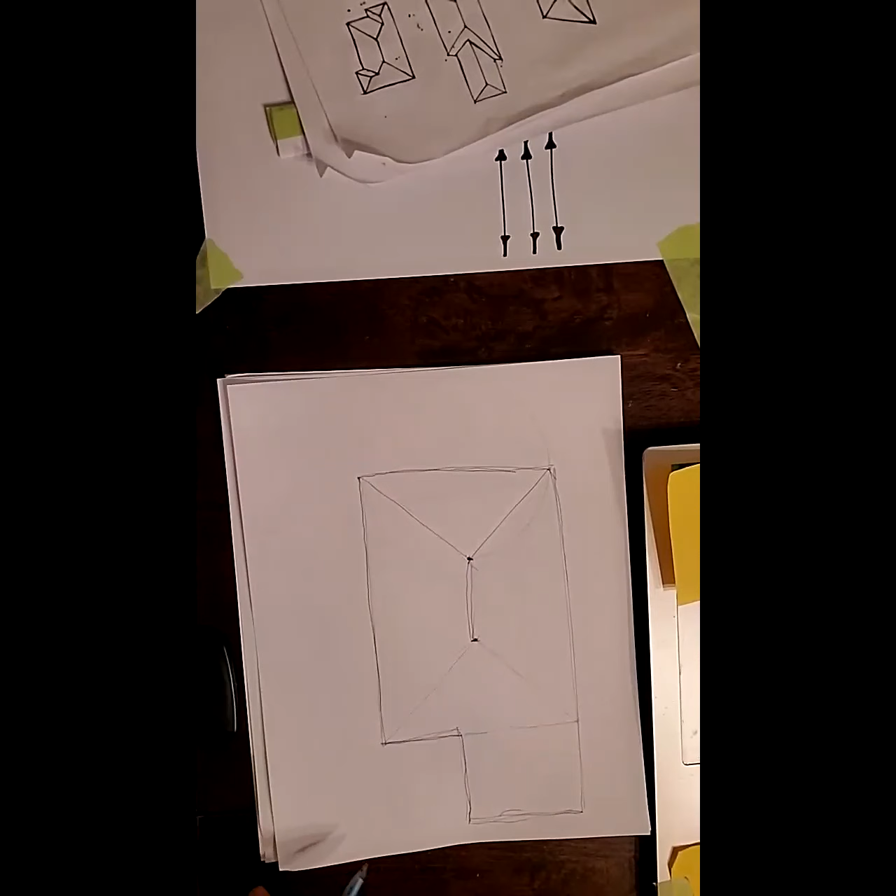Then you draw a line from here to here to complete the roof framework, the hip roof, to complete that first thing. We know that this one here will cut off at some point in time. Why? Because this end is not generated from a corner. So we know at some place on this line it will merge with another roof line, which will cut off at a point. Yeah? You have this so far?

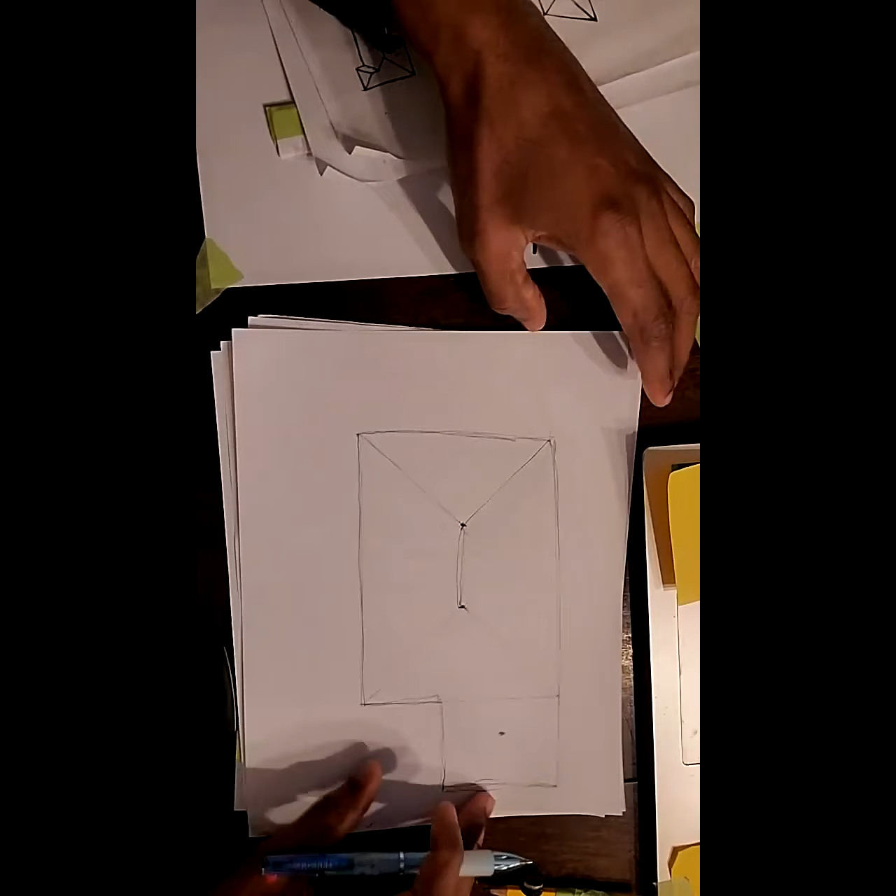Yes, sir. Okay, so our next step now is to go back to this here. And we know that this ridge is gonna run into this. So we're gonna find the pitch for this roof. Again, we use half the distance of this side, half that distance. And we mark that point right here. So we use this to get that distance. We get that point right there. Yeah. Then we draw our first construction line right here. First line right there.

And of course, we remember that the ridge must always be parallel to the longer side. Yeah. The ridge must always be parallel to the longer side. Very important. So we draw this line here until it cuts here. Yeah. Now at the point where this line meets that line is where this hip rafter stops, right here. So this hip rafter stops right here.

Yeah. And in like manner, this corner right here automatically joins at this point right here. Or it is at the same angle like this. So in AutoCAD, you could even copy this from here to here. And again, it is important to note that this line basically bisects this angle as well, either this way or that way. So remember the hip rafters always bisect the angle, right? So that goes up to that. Are you following? Yes, sir.

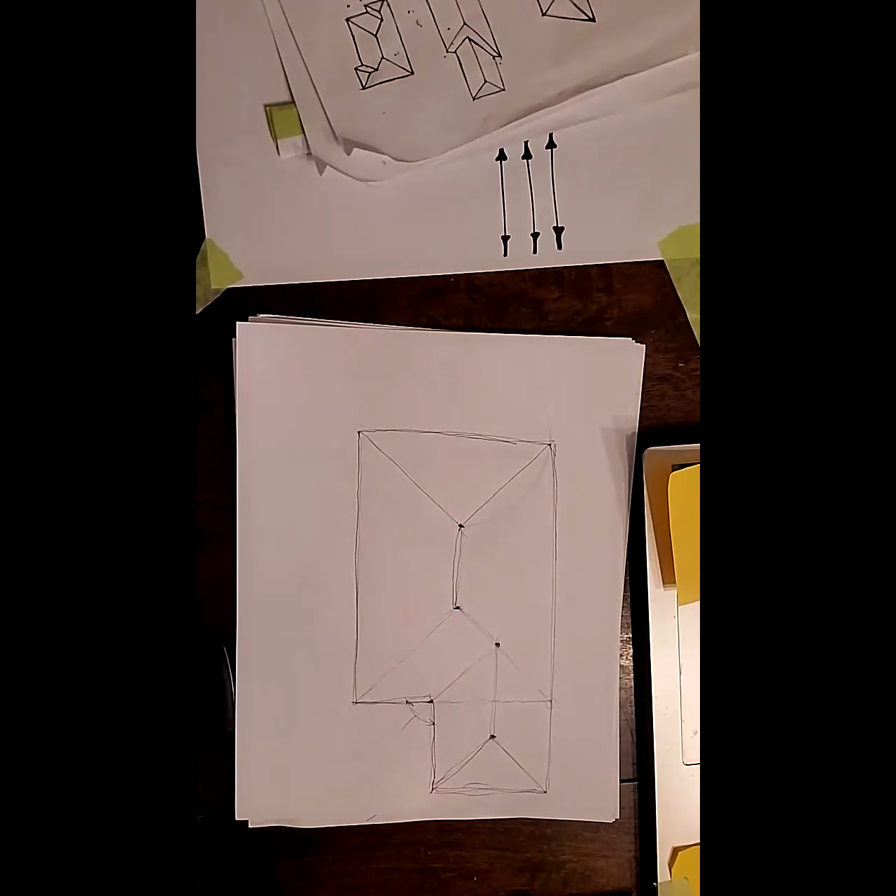Really, really curious. Now the next step would be to start to brighten up. So I want to start to brighten up from here, from here to here, from here to here. This point to that point, here to there. So this ridge meets that ridge right there. Then from here to there. Then from here to there.

And we could then go ahead and brighten up even from here to there. Brighten up this. Brighten up that with our outline. Brighten up this as well. Brighten up that as well. And go on to brighten up this part. Then we go from here, that point, there, here. We then brighten up this part as well. From here, we brighten that part.

And we end up with our roof outline. So in this case, this roof would pitch in this direction. Pitch here. This would also pitch in that direction. Pitch or slope. This is slope in that direction. This is slope here. This is slope in that direction. This is slope here. And this is slope in that direction. Yeah. That would be our roof.

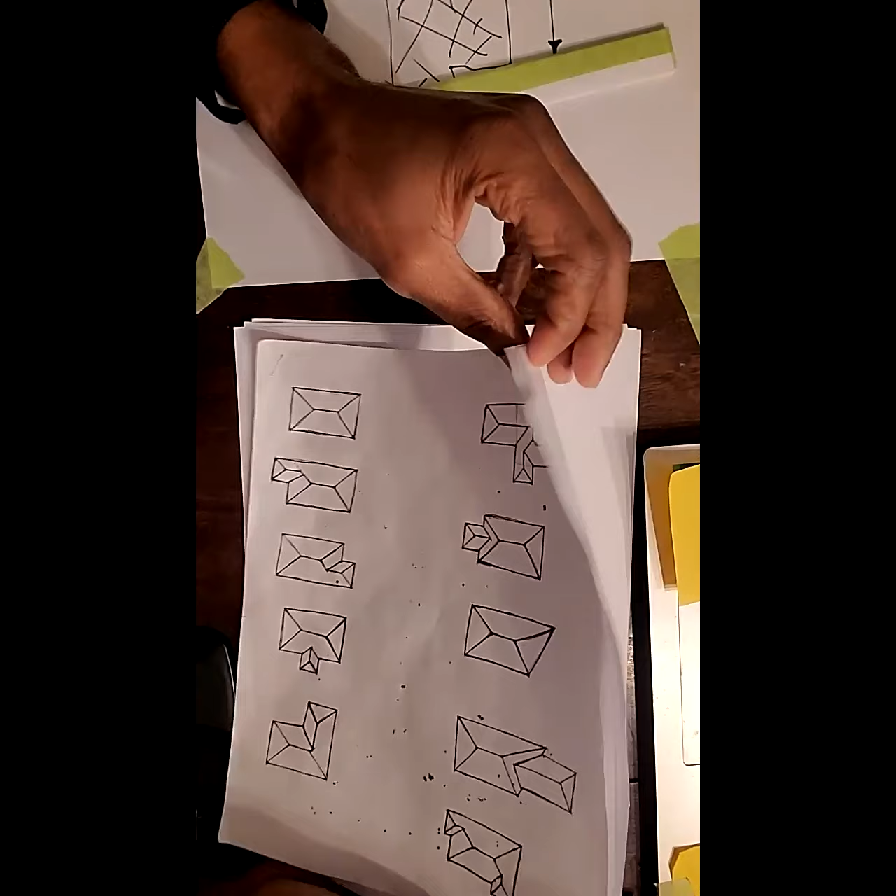What time is it now? I would want to do at least two more. You don't mind? Let me see what time it is now. I'm gonna go get another blank paper. Okay, yes. Well, you could do it in your AutoCAD book if you want, man. No problem. All right. But what if I use blank paper? Fine, no problem. But make sure to keep all those papers safe, okay? Okay, sir. I have a folder, so I'll put them in there.

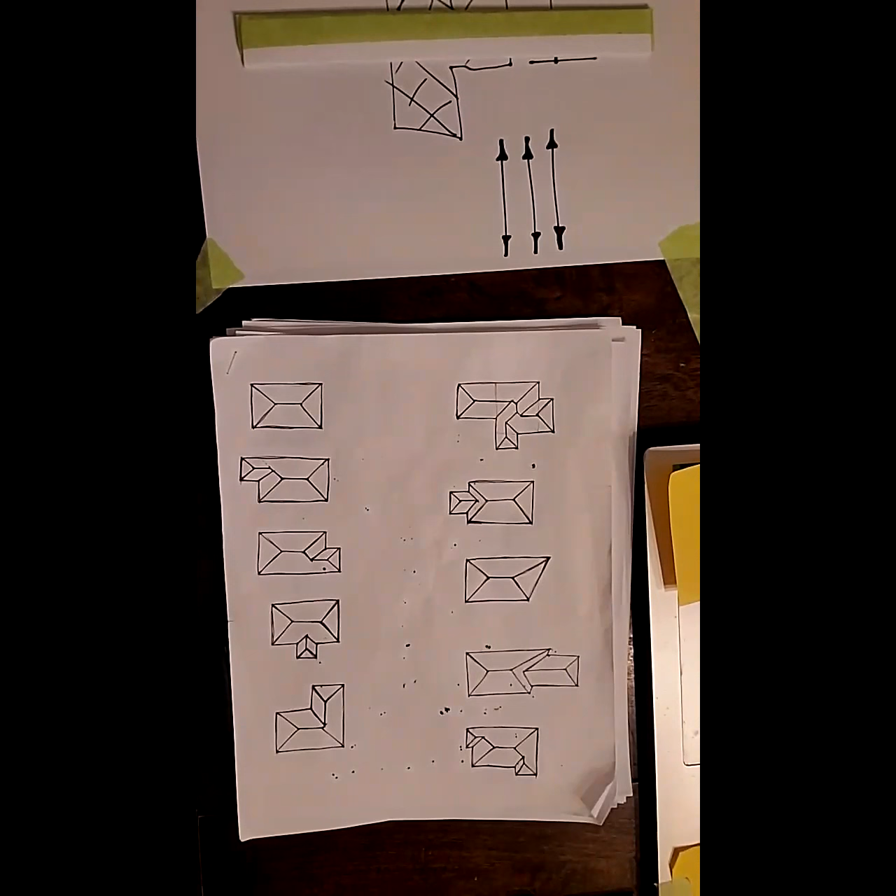Great. Now, let me get another blank sheet and move on to another drawing. Now, for this one, you have one that's shaped like this, pretty much similar to what we had before. All right, let me add a little more to this one. So the first one looks just like that. Let's add a little bit more to this one. Something like this. Adding some more to it, all right? So sketch this, and then we move on, all right?

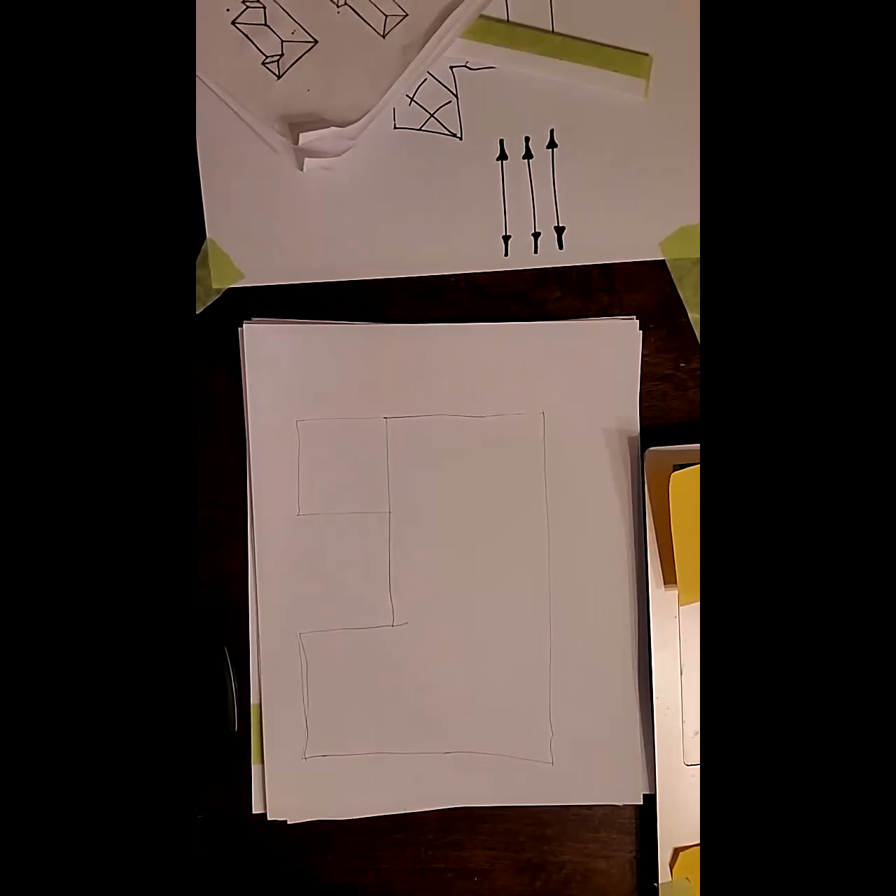Now, looking at this again, the first thing to do is to look to see where we can get the largest possible rectangle to be formed. The largest rectangle would be created from here, here, coming down here, going across here, and back to there. This would be the largest possible rectangle, right? Yes, sir. And our ridge would be along the longer side, which would be here. Right? Yes, sir. All right, good. So now our next step would be to focus on these four points. 1, 2, 3, 4 points.

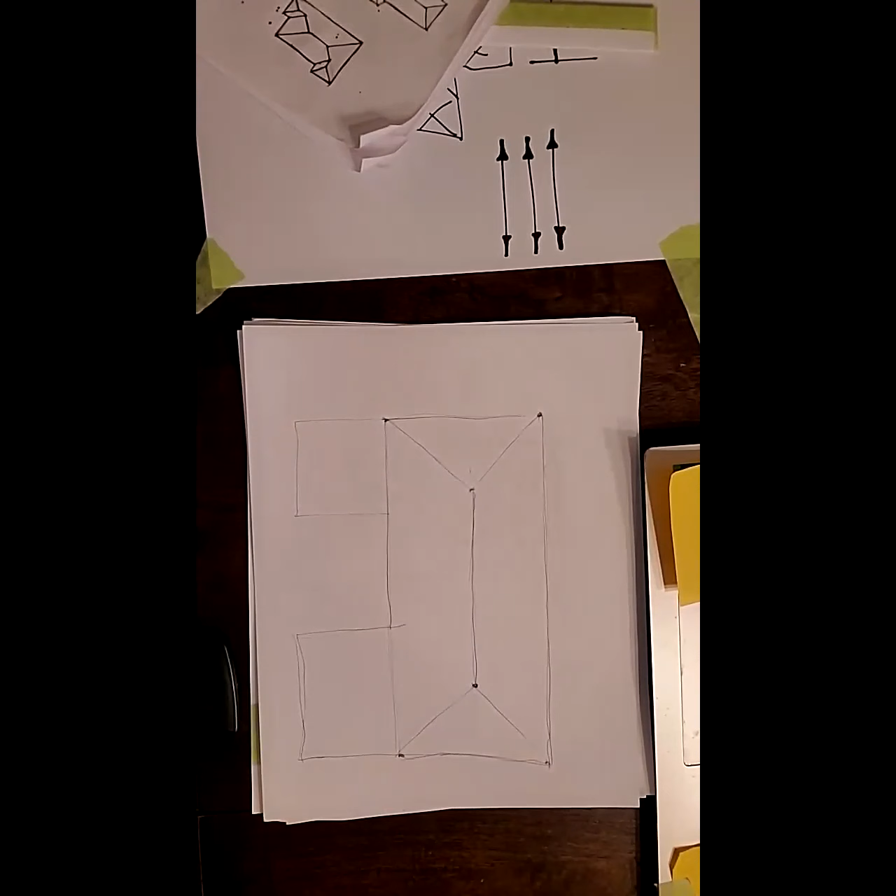Again, we would use AutoCAD. We would draw a circle here, or if you're using the traditional method, you would have this here, then to that there. So you will transfer this distance onto this. Then you draw a line from here to there. Then one from here to there. And of course, we find the middle of that point as well, which should be the same distance here from there. We get this point. We join from here to there, and from here to there as well. So we get those points. And of course, our ridge, which is right here. Am I going too fast? No, sir. Okay, so do you have this part already? Yes, sir. Okay, great.

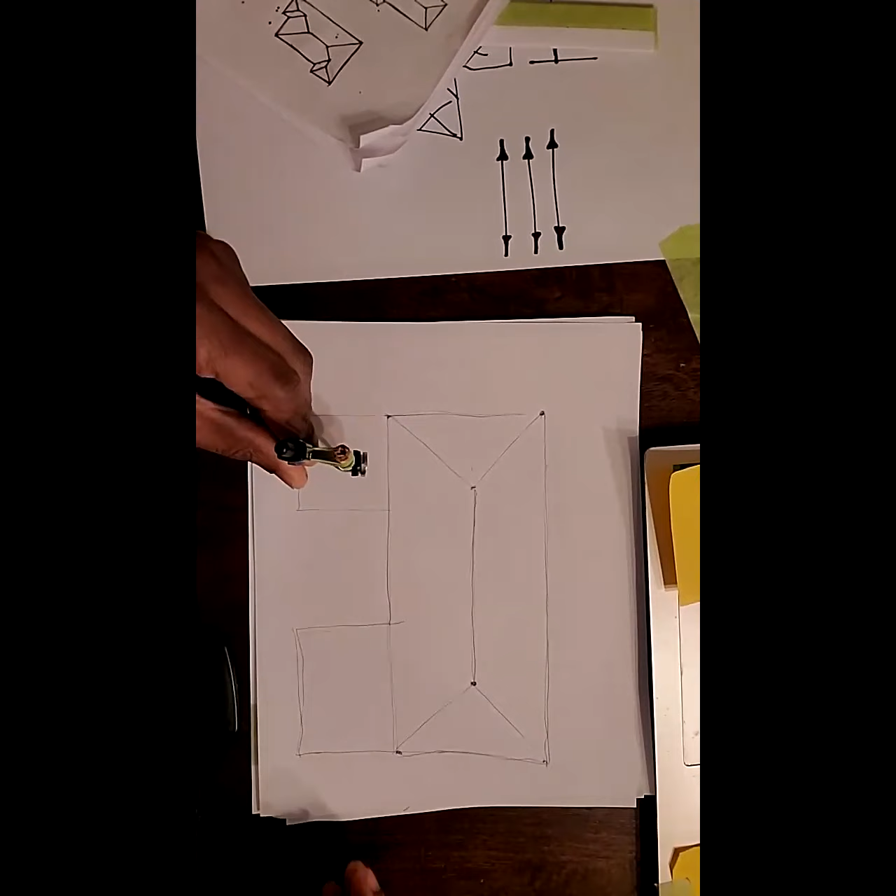So our next move now would be to apply the same principle here. Find the center of this and get that point right there. Mark this point right here. Mark this point right here. Then join from here to there, and from here to there.

And then, once you have done that, our next step is to draw our ridge board parallel to the side right here. So we draw a parallel line all the way up until it cuts this hip rafter right here. And remember, the golden rule is that any hip rafter that is not generated from a corner like here, the excess must be removed. All right, so we do that.

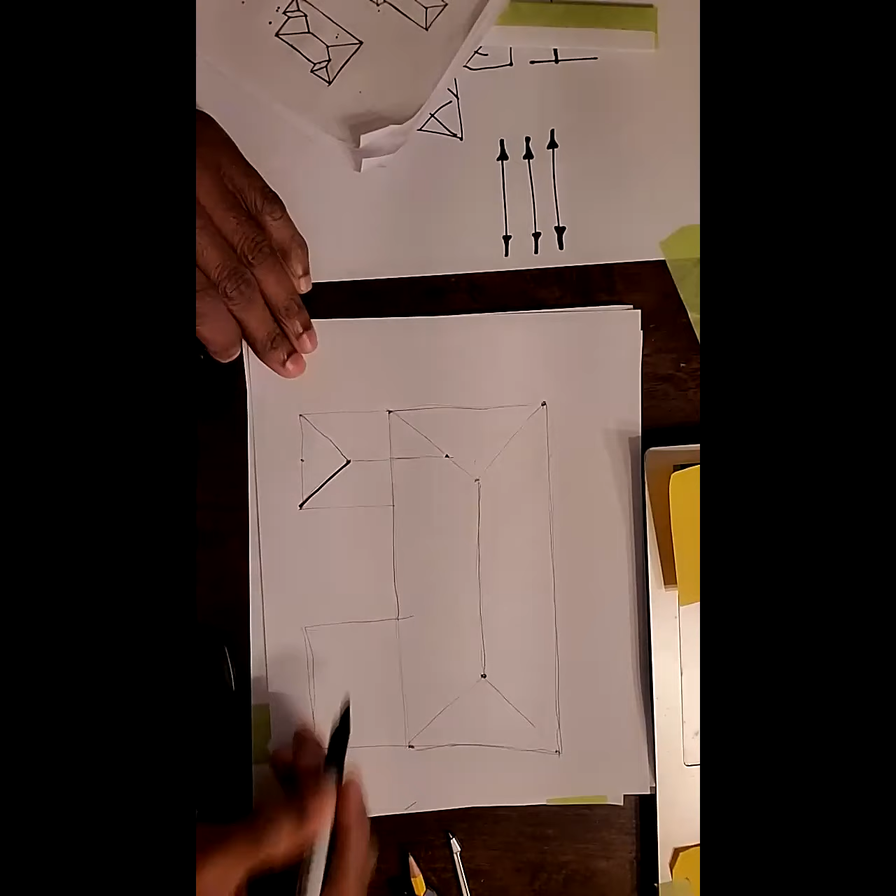Our next step now is to, in like manner, let me brighten up this first. We then go here, brighten that part, come here, brighten that part. And at this point here, this hip rafter would end at this point right here, and then it would meet into this

ridge right here. So now, it is important to note that the roof must be designed in a way that the pitch from one side would go onto the other, which will allow the water to run off the roof. This is something that I will discuss in a little more detail with you. All right.

So this would be a valley right here. And of course, all corners must be bisected, and a rafter must run from every corner basically. So this corner here, from there, you have that. We come here, we could brighten up this as well. But this one doesn't go to the end. Again, this one is not generated from a corner, so this one will stop somewhere, right? So let's see where this one will stop.

Again, we find the midpoint here, midpoint of this. Get this point here. Get this point right here. Draw a line from here to there. Line from here to there. Then we're gonna draw a line parallel to this line. In some cases, like in this case, the parallel line ends right at this point. Which means that this line doesn't exist or will not be drawn.

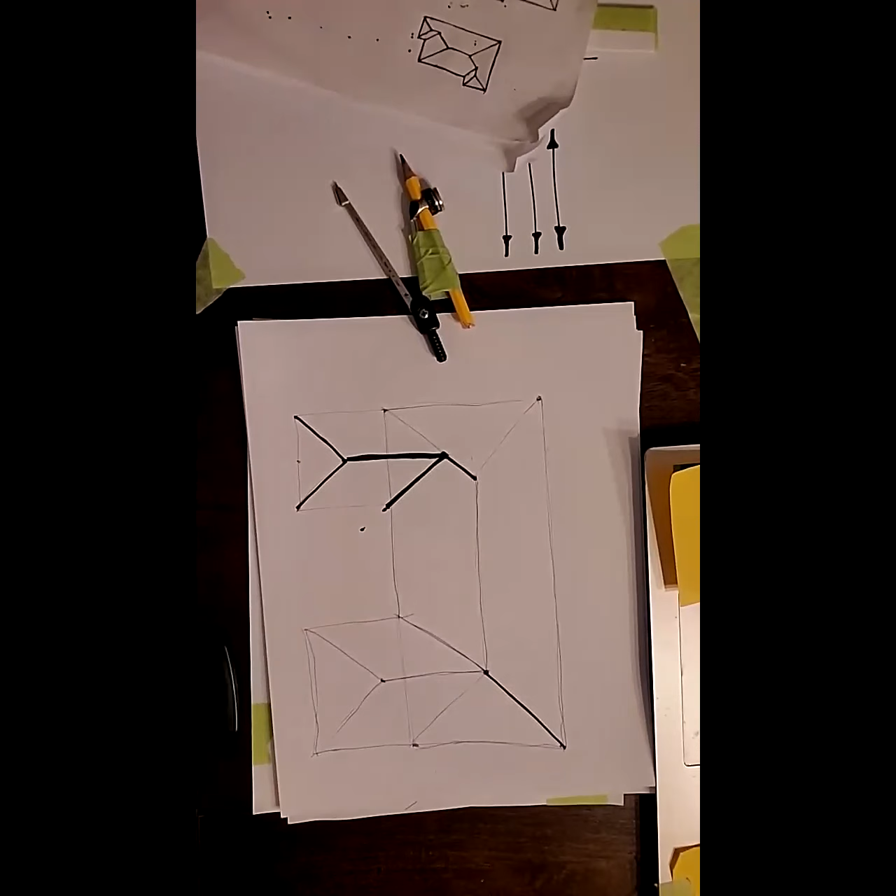We're gonna delete this one. Then we're gonna join from here to this point here, and our roof will be done. So this one has to go because it wasn't generated from a corner and it didn't cut into anywhere. It must be generated from a corner and it must cut onto a ridge board for it to be recognized.

And this would be from here. This would be joined from that. This would come from this point all the way out to there. And this comes from here up to that point. And this comes from here. This to there. This to there. And this comes from here to there.

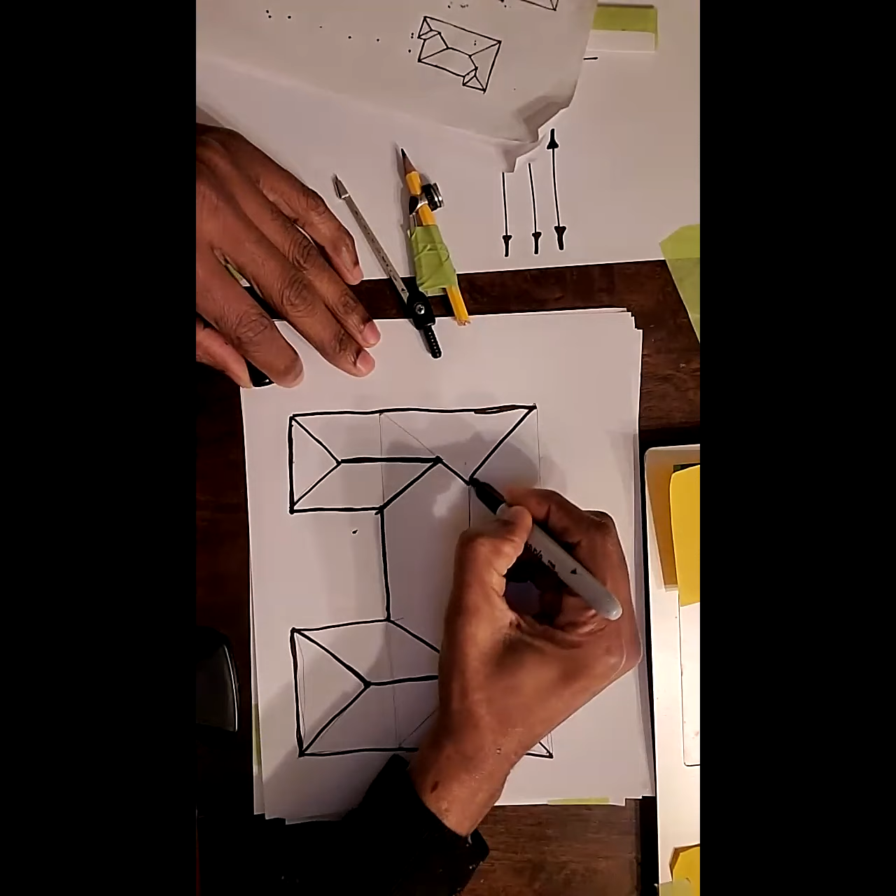This from this corner to here. We brighten up that. We also brighten up this one from here to there, and from here to there. Right? This is basically the outline for the roof.

I will be doing one more and then let you go, all right? I'll send you that file for you to practice those drawings. Yes, sir. I'm done this one. All right. So this is that.

And I'll be showing you how to pitch your rafters. Your rafters would be from here, here, there, after there. They would go over on that side as well. Remember, you always start your rafter at the corner right here. I did not follow that rule just now. Always draw these ones first and then we offset to get those.

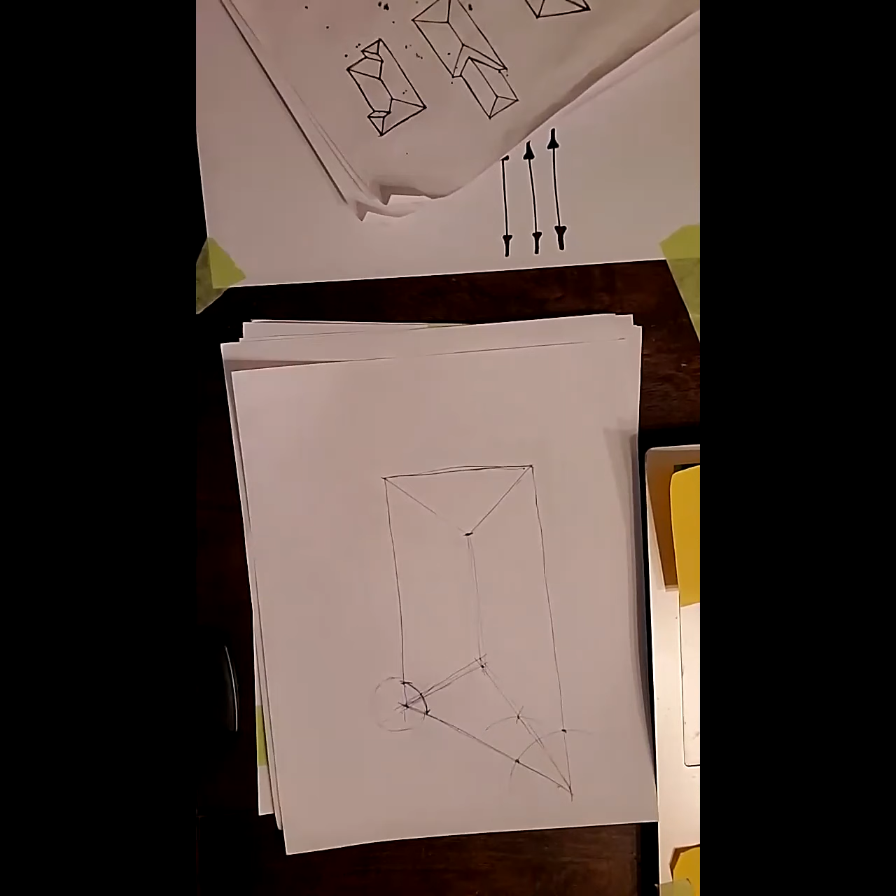You would then place a compass there, scribe an arc from this point. Without changing the compass radius, you go to the side, scribe a second arc there. At the point where both arcs meet is the bisector. So you draw a line from here through there. But of course, I'm using sketch, so I'm not going to all that fancy technique. Now, it is important to know that with this technique, both of these will eventually fall at the same place. They should meet at the same place here. If they do not meet at the same place, it means that something is off.

You then go ahead and brighten up from here to there, this on that side, come back, go there, then from here to there, and we have that. We then use that. And this is our roof. Yep. This is our roof.

In a case like this, we would not draw the rafters perpendicular to this line as the rule dictates. We would draw it like this. The rafters would be like this. Again, start with that. Mark off here 600. Offset that 600. And you start by drawing this at this angle, then these would fall in place there. Again, these would be at 600 apart, and they would eventually meet here like that. Yeah, so it would look something like that in reality.

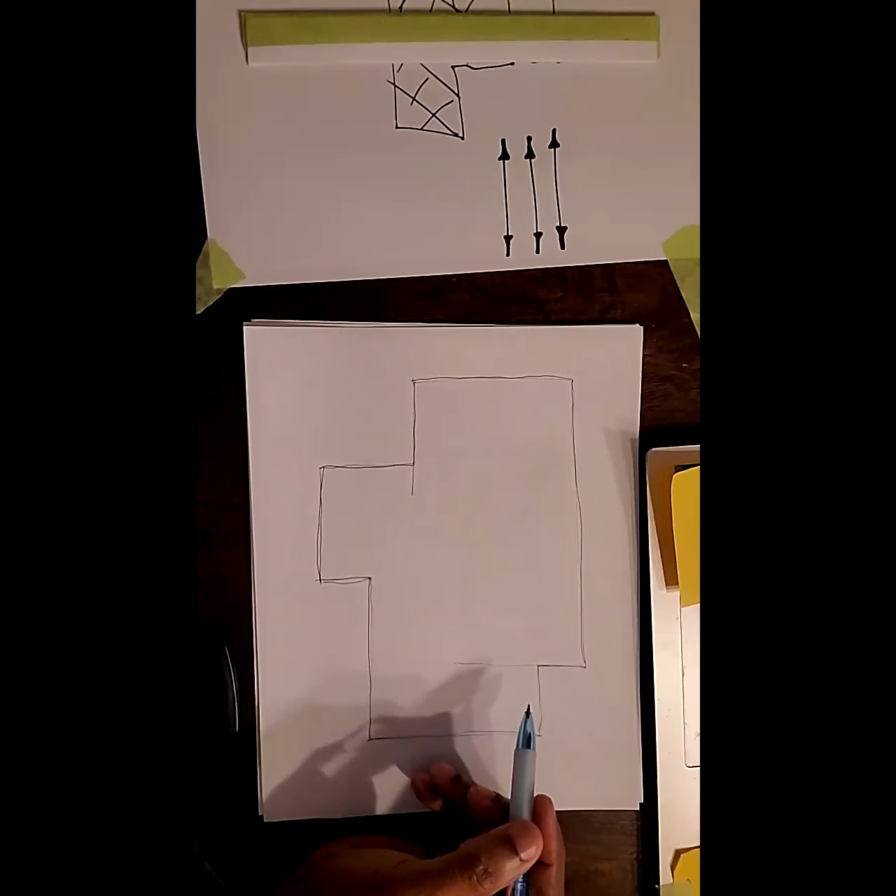Finish, sir. Oh, great. Now, what is our first step? Divide the shape into the largest rectangle. And in this case, it would have been, let me see. Oh, sir, that don't look like it's gonna work right now. Yeah, this one is a little tight.

Let me see. I could do that. I could cut it like that. I could cut it this way. We cut it here. Come here, come across here, and go up here. That's another one. Yes, sir, I could go that way. What do you think? Go with this one.

Yes, sir. I should go with that one. Yeah, by the way, yours might look slightly different from mine because your measurements might not be exactly as mine. So bear that in mind, all right? Yes, sir. Now, let's say for example, I work with it that way. What I'm gonna do, I'm gonna reproduce this using that method.

Probably not right now because they might be tired. I'm sure they might be tired and exhausted.

They might, you know. So my next step is, so this will be my first, my rectangle. I'm gonna, of course, go through and apply the principle. This one's a little bit long, so I probably should, all right, let me not. All right, guess what? In a case like this, if you're using freehand sketch, this is how you can bisect a line or find the midpoint of a line real quick. Look at this.

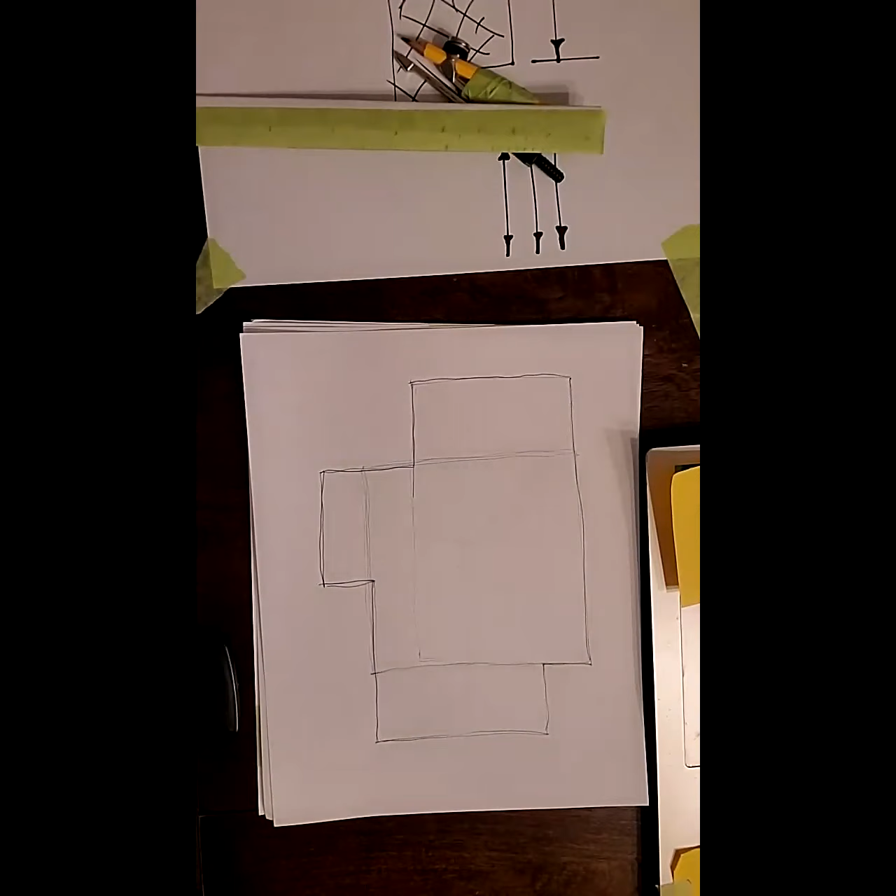In subsequent class, I will be showing you how to use a sketch for your freehand style geometry. That will be based heavily on sketch. So look at this now. This distance is a little long, and I'm not quite sure exactly where the midpoint is. So I grab a piece of paper, and I mark off the distance right there.

Then I fold the paper at both of the marks and create a crease on the paper. Create a crease right here. So these are the two marks, both marks right there. I crease the paper, and this now gives me the center. So I can simply mark off the center real quick. Here will be the center. And I could then use that to get a more accurate distance there.

You get me? So you can use that to bisect or to find the midpoint between a distance. Get a piece of paper, mark off 2 points, then fold it by aligning both marks, and at the point where it creases is the midpoint. It's a technique. Yes, sir, I've done that. I need to determine which part of this is longer because the pitch should be on the shorter side.

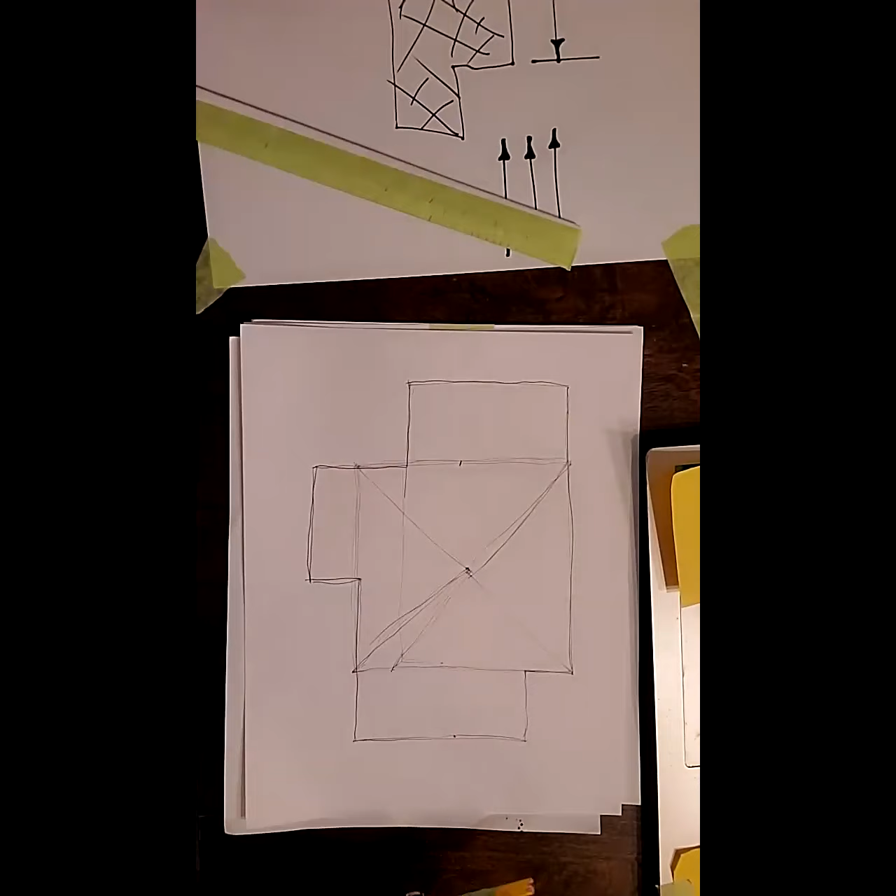So for that, I will be using this piece of paper again to find a midpoint because this distance is a little long. From here to here. And the midpoint would be here. I'm using this paper to get the midpoint again. Of course, I could bisect the line, but I want to teach a new technique where you can use paper as a compass and as a drawing aid.

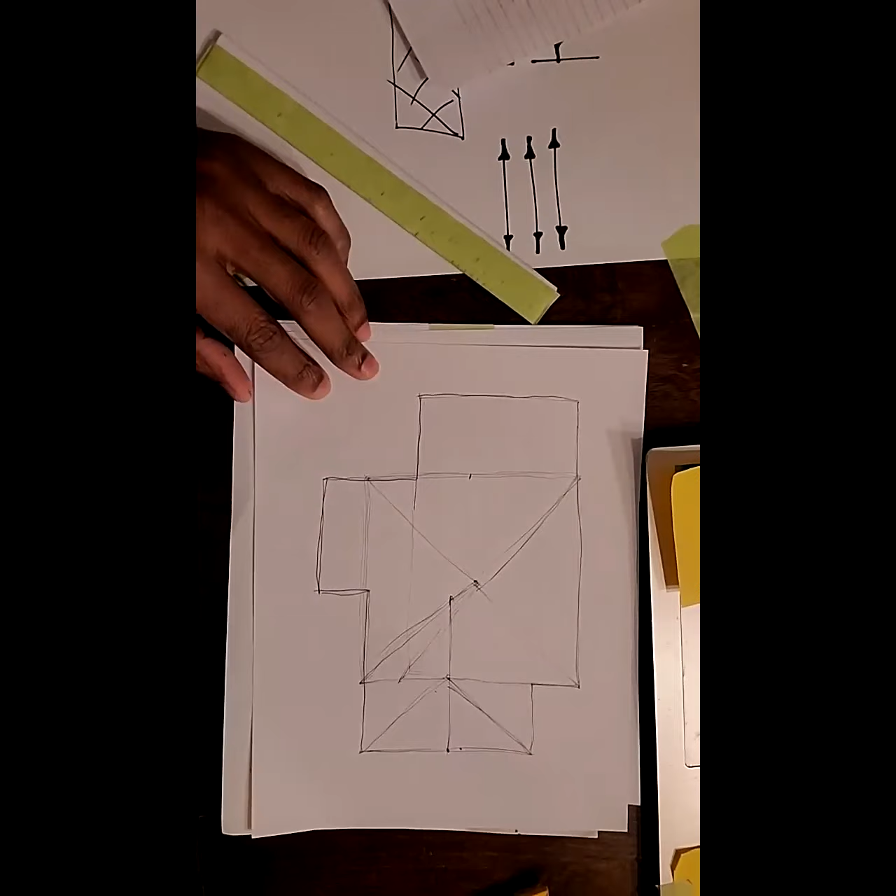So we have this. Now I'm going to draw my parallel line, which is along here, to get this side. So remember, I need to draw this. This goes to there. That goes to there. This comes to here. And here is a major point, right here, and right there. So remember that this end doesn't originate from a corner. So this end will stop right here.

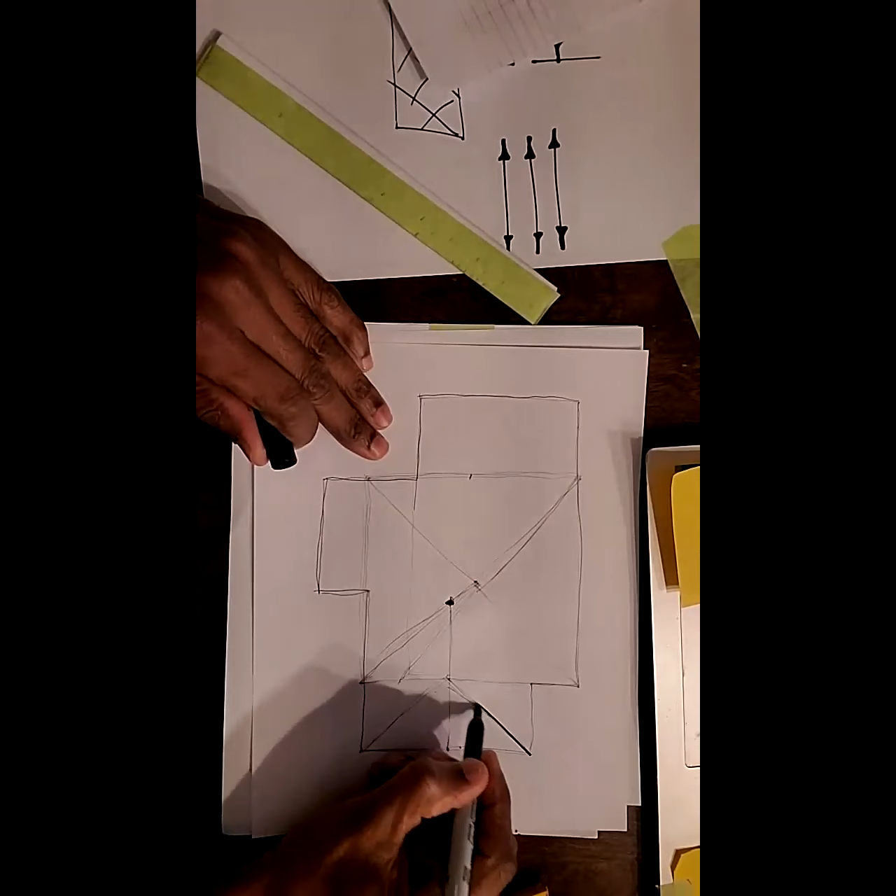That is good. So we could go ahead and brighten up this part of it at the same time. We could brighten up from here to here first. Let me start with here. And then from the ridge to where the ridge cuts that roof. There to there, we have that. And then we could join from here to there.

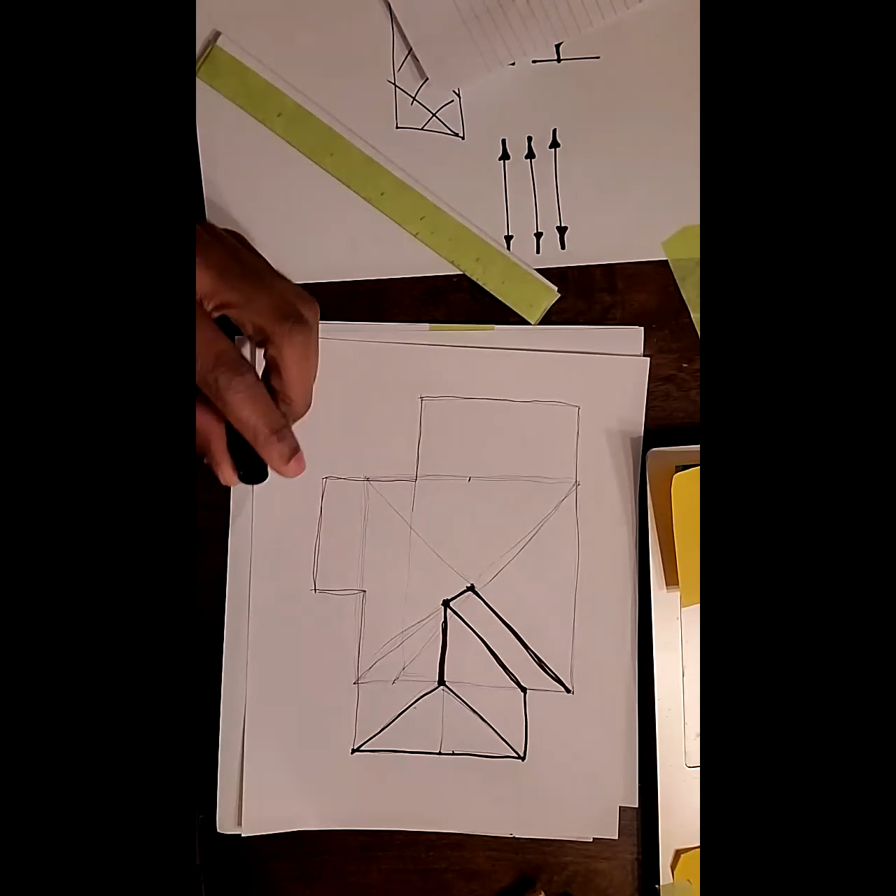And we could join from here to here to get our valley. Then from here to there, you could brighten up around there as well. And we could stop right there for now.

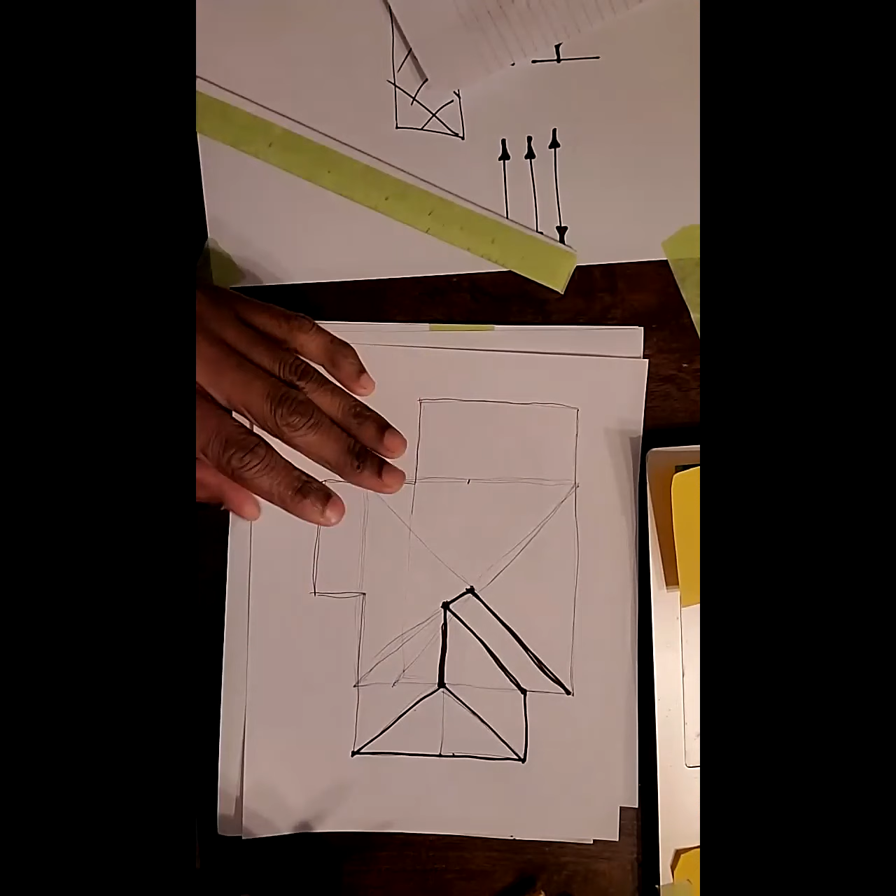Now let us move on to this side. Again, this roof pitch does not originate from a corner, neither does this one. So we could tackle either this side or this side. Same difference - we are the master at our craft. We know what we are doing. We follow the rules.

Now the next step is we're gonna open this to here, and we getting the center for this. Again, we transfer the half of the distance here to the center right here to get that point. Then we join from here to there, here to there, and from here to there.

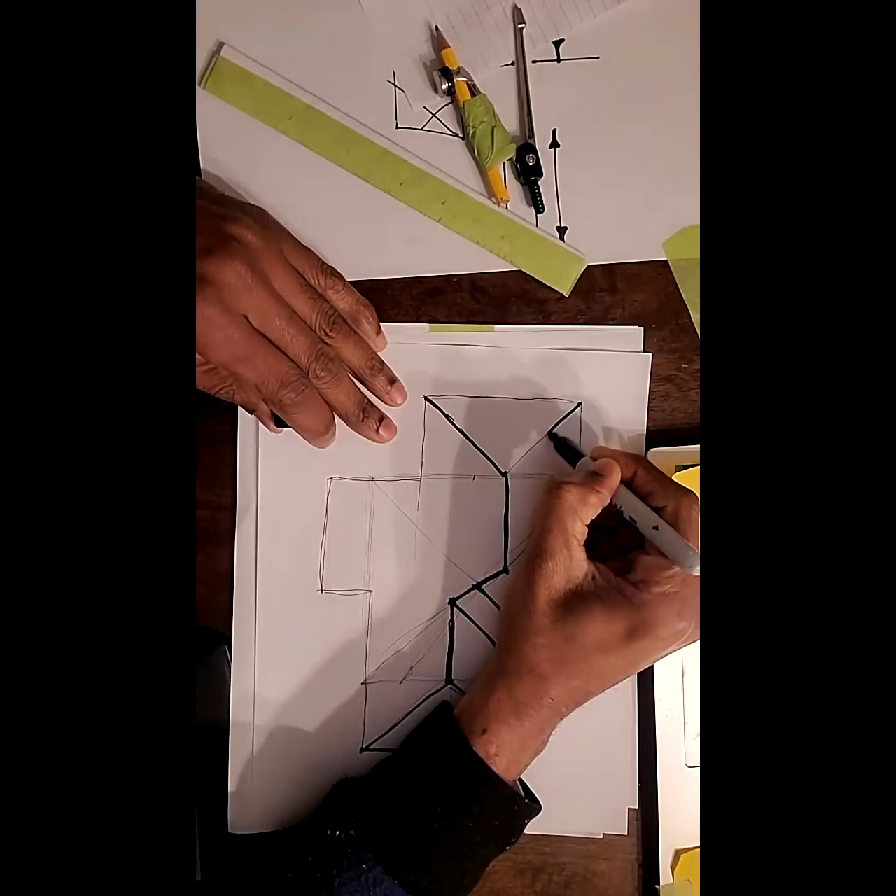Our next step is to draw a parallel line here to that. And I'm going to identify this point, because everything from here down is removed since that was not generated from an end. So we stop right there, and we bring this to there, that to here, and that part is now done.

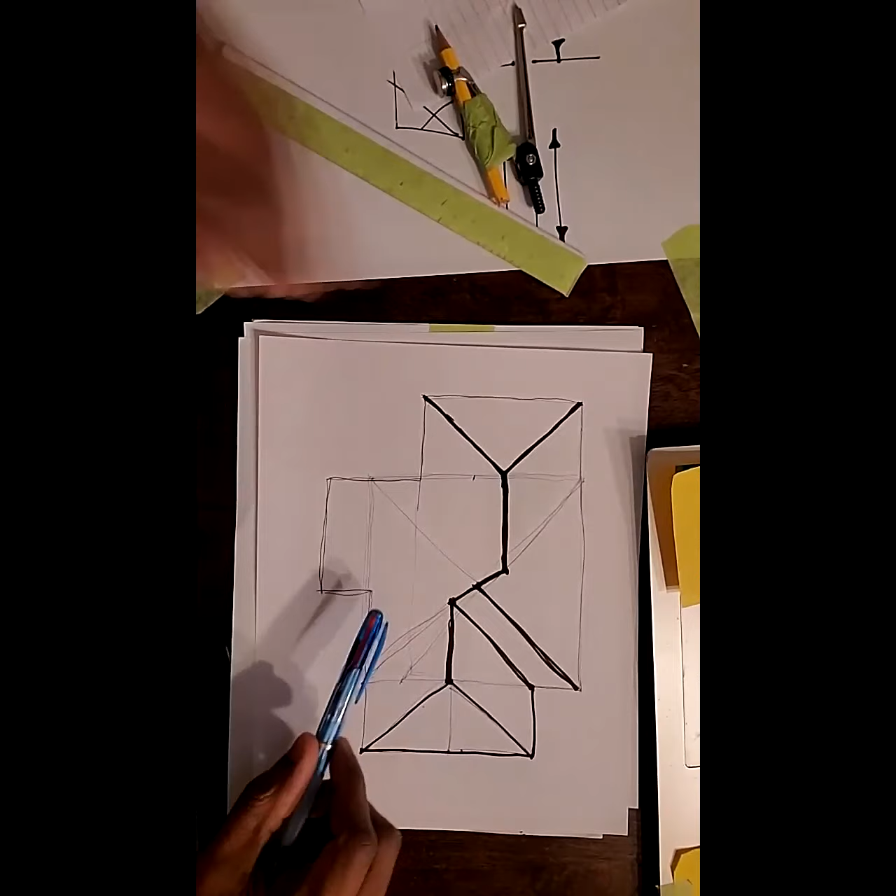Now onto this piece right here. For this part we need to draw our valley. Remember, every corner needs a rafter generated from it - all the corners must contain a rafter. So we have that to that, that to that.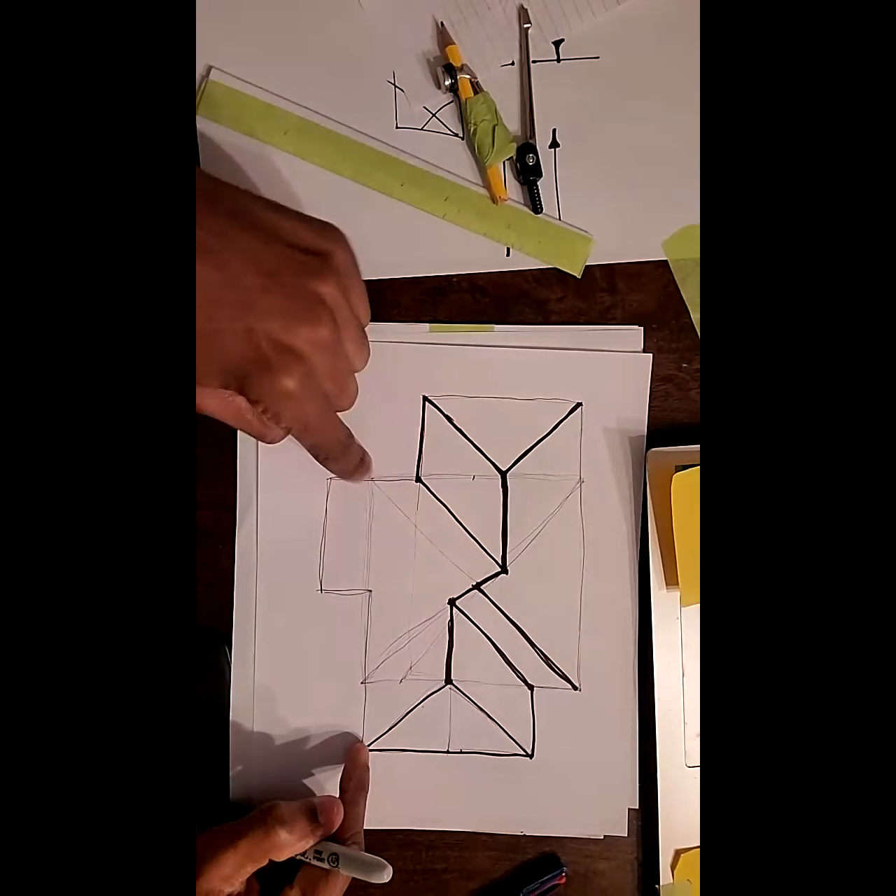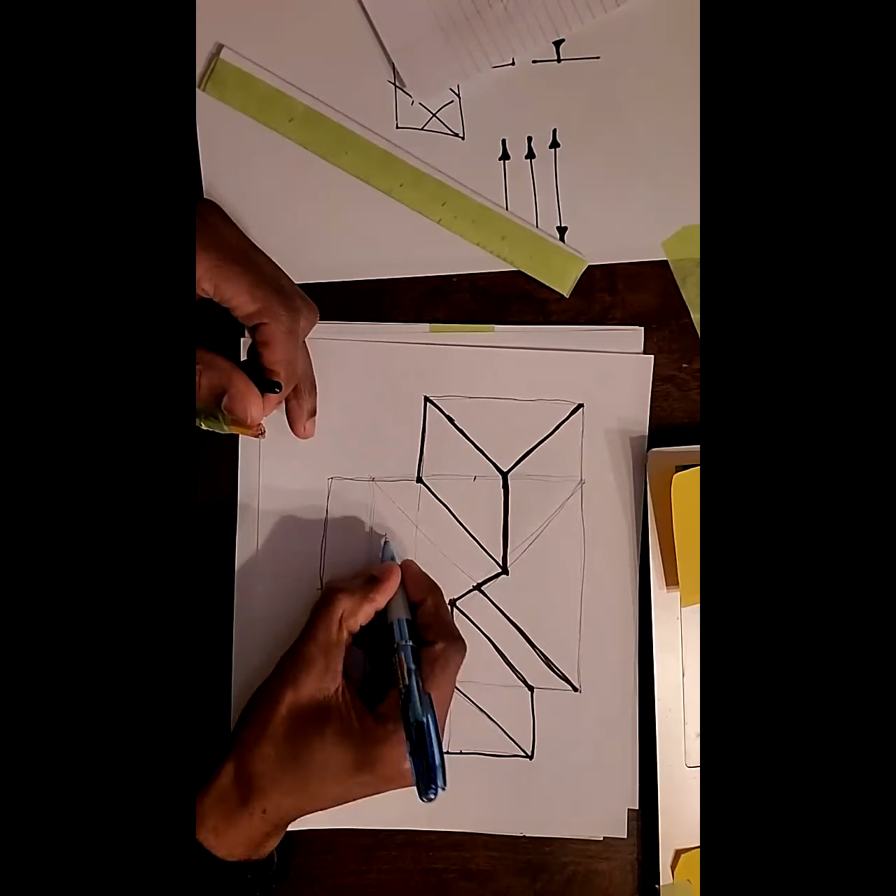Now we have another roof here, and we have a next piece of roof running from here, this piece of roof here. Again, we apply the principle - we get the midpoint here, and we establish that there at the center. We get that point, then we join from here to there, here to there. Then we bring this out like this.

Remember, our ridge must always be parallel to the side right here. So when we bring this up, at the point where it cuts this other hip rafter, we stop - ridge cut hip, we stop right there. We get that, and we bring this down to here. That stops right there, this comes here.

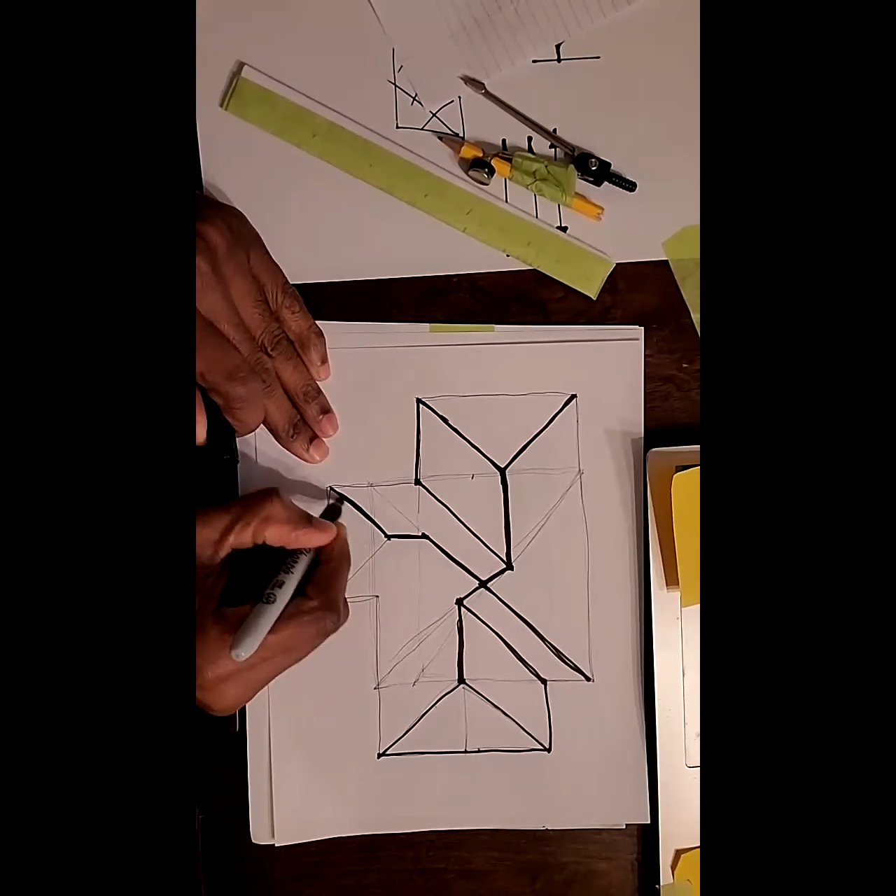This comes across to here, and this comes across to here as well. And this automatically falls in place, this automatically falls in place. So the roof pretty much communicates to you basically. Once your roof is right, it communicates with you - everything, every part simply falls in place.

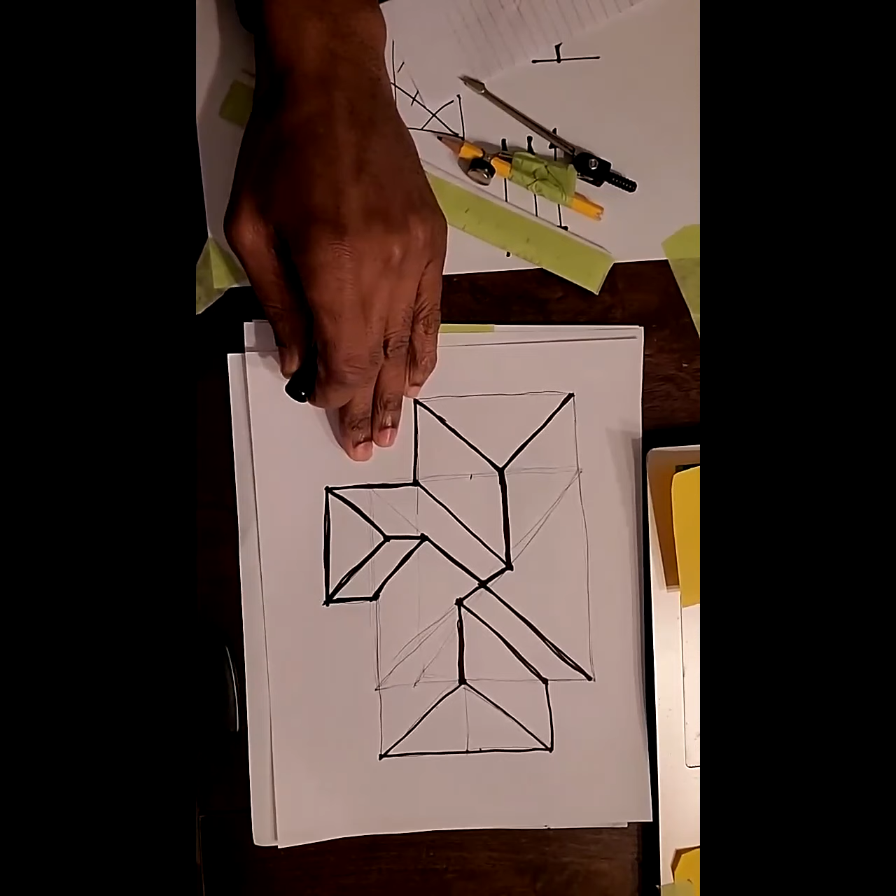We then draw this line out to here, and this comes here, that goes there. We then brighten up this part, we brighten up that part. And I'm gonna finish off this section.

This is our roof, this is it. Again, it might appear complicated - this is a complex roof, but if you know what you're doing, your complex roof will look as simple as ABC. So again, to get our rafters, I'm gonna do this real quick because time is against us.

This would be like here, this is like here, this would be like here. This would run like this. I'm in a rush guys, so if I make some mistake on this, forgive me.